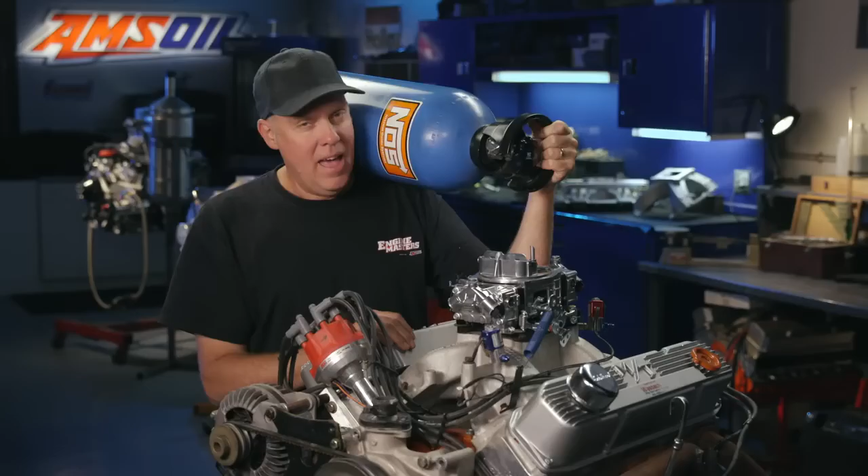I know you've read it, but is it true? Would you really blow up your engine if you ran nitrous oxide on a dual plane intake manifold? Well, we're gonna find out using the 383 out of the Roadkill Crop Duster, this time on Engine Masters.

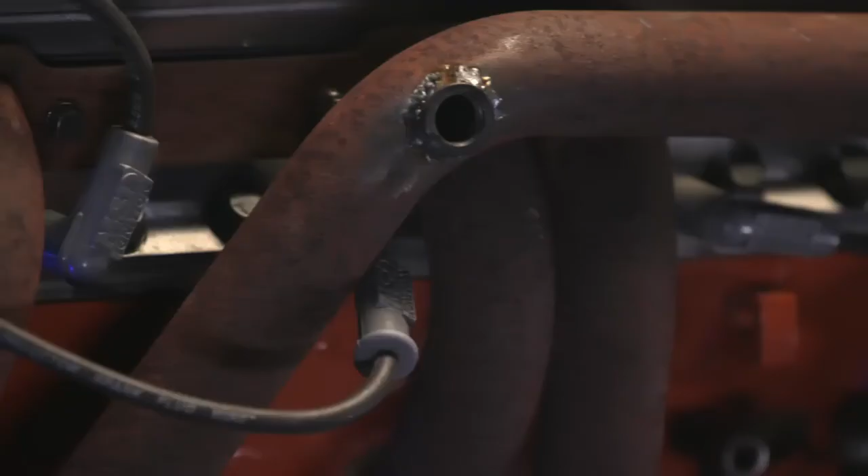Well, we're gonna find out right now, and here's how. We're gonna run both a dual plane and a single plane intake manifold on this big block Mopar, both naturally aspirated and with nitrous oxide, and check that cylinder-to-cylinder distribution with an oxygen sensor in every single header tube, so we'll know exactly what's happening in each cylinder.

That's gonna give us answers like: is the dual plane really that dangerous? Does a single plane make more power on nitrous for the same nitrous jet than a dual plane? And we're also gonna answer questions about how much power this particular engine makes.

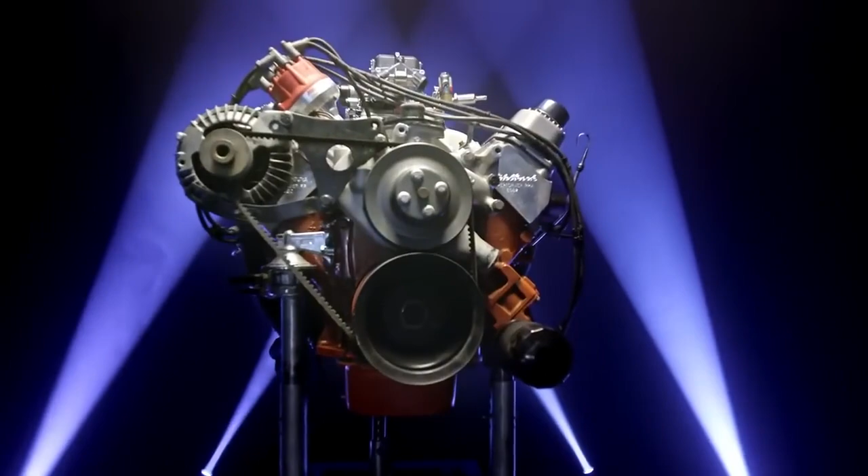Now here's what makes this engine cool. This is the 383 big block that is directly out of the Roadkill Crop Duster. You've probably seen that car, it's a white 1970 Duster that's been on both my Roadkill show and also Roadkill Garage. It's a pretty easy buildup that has run 11.60s in the car.

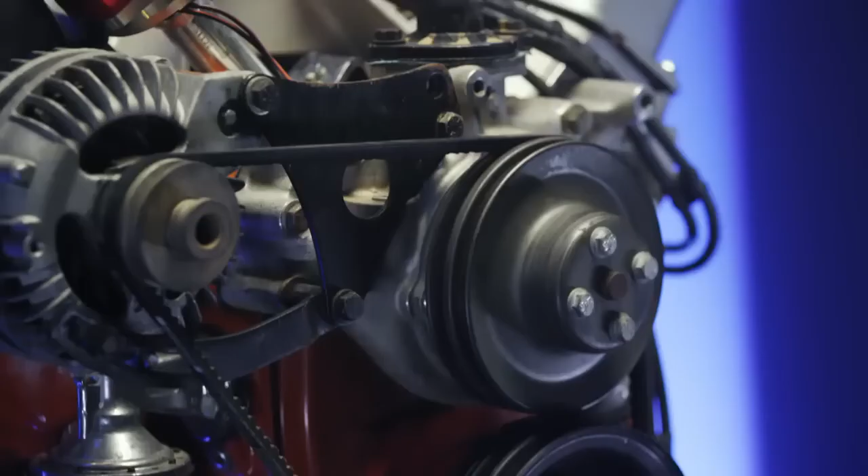Here's sort of the combo: bottom end, stock crank, stock rods, forged pistons, 11.5-to-1 compression. These heads are straight out of the box Edelbrock units, no big deal. Up top, we're gonna start off with the Performer RPM intake manifold from Edelbrock. The camshaft is a Comp Cams solid flat tappet, duration at 50 thousandths is 241, 247. Up top we've got an 850 Brawler carburetor, and we're running MSD ignition on this thing.

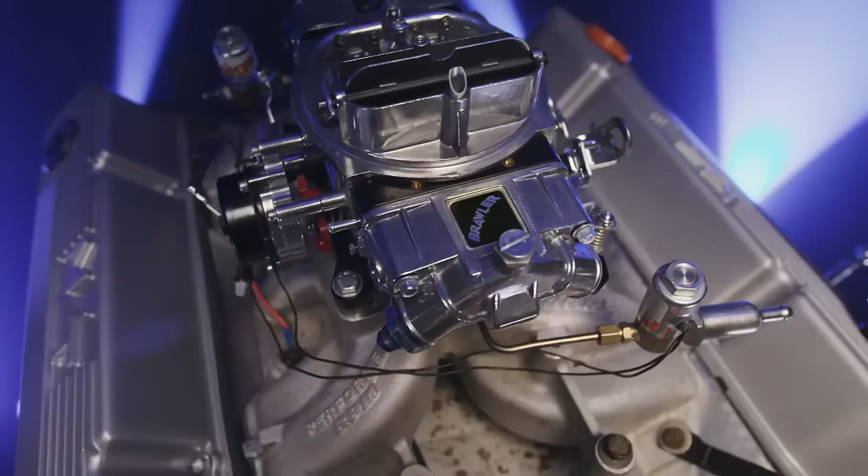And now we're gonna roll it into the dyno, put some AMSOIL in it, and fire it up for a baseline to find out what this thing makes before we start huffing some nitrous through it.

The stock crank and rods in this thing are gonna need all the help they can get, so even though it's kind of a basic deal, I'm gonna go all the way with the Dominator racing oil. Whenever I run a power adder, AMSOIL always tells me to run this stuff because it has really strong film strength. Even though we've got a small nitrous kit here, I think nitrous is one of the most abusive things on bearings, more so than a turbo or a blower, because you hit the button and bam, power increase like that—it's not like a slow boost curve.

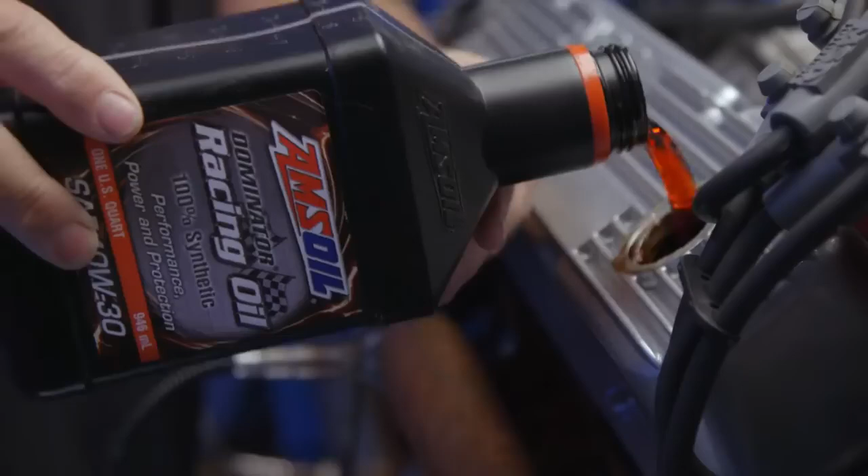Okay, we're ready for our baseline, which is the Crop Duster 383, pretty much straight out of the car with the exception of a different header and different carburetor. It even still has the alternator and the water pump and stuff on it. So Steve's got it tuned up, ready to fire it up, see what it does.

It's gonna be cool to watch 8 oxygen sensors in real time. Lighter? Yeah, why? We knocked about 2 pounds of dirt off of it.

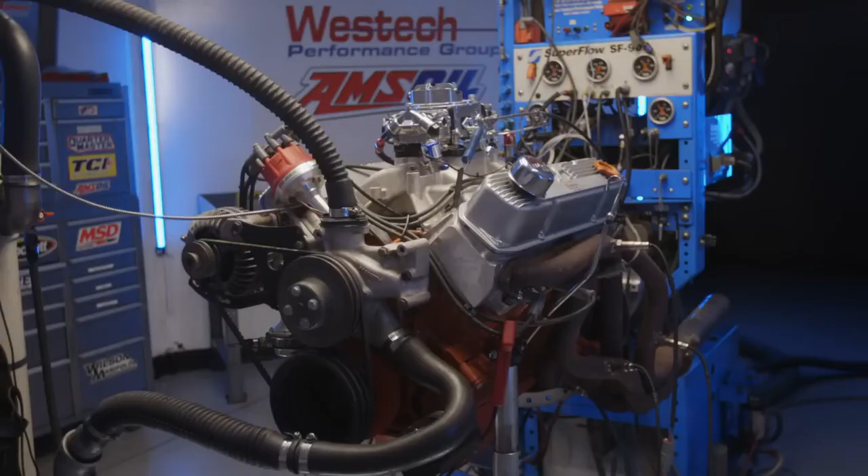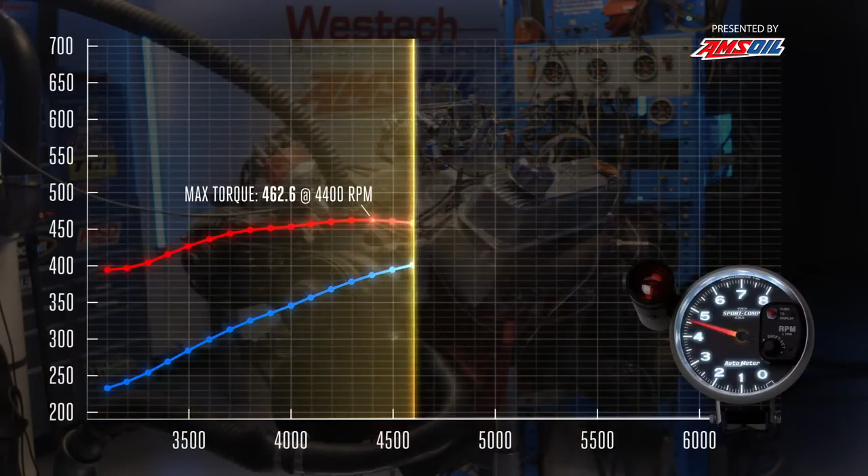Kind of a dog. I didn't even look at the power numbers, I was looking at the lambda. It's shameful.

462.6 pound-feet at 4,400, and it made best horsepower of 459.6 at 5,800. I think there's a number of reasons for that—this header's much worse than what we ran before. This is not a good header. No, it's smaller tube, and this has a terrible collector on it.

Plus, we have a mechanical water pump and alternator on it, and a different carburetor, and we're running 36 degrees of timing. This engine likes 40, but we wanted to do our nitrous testing A-B comparison with no other change other than the nitrous, so we pulled a few degrees of timing out of it.

But let's have a look at the whole curve. Yep, it's just down 40 horsepower from what we'd really like it to be. I think the header, the accessory drive, the carburetor, it all adds up. And the timing.

You know what I noticed though, looking at the lambdas, there was quite a bit of variation. I mean, some of those holes, there were 2 ratio points difference or more, cylinder to cylinder. Let's have a look at that.

He's got it pulled up here. When you start looking at cylinder number 2, it finishes up at 11.9, and then cylinder 4 is 13.7. Almost 2 full ratios in cylinders that are paired right next to each other, 2 and 4. And that's just a matter of air and fuel getting through the intake manifold.

I noticed it was kind of leveling out as RPMs increased. At lower RPM, there was more spread. It seems to kind of even out when you see it here.

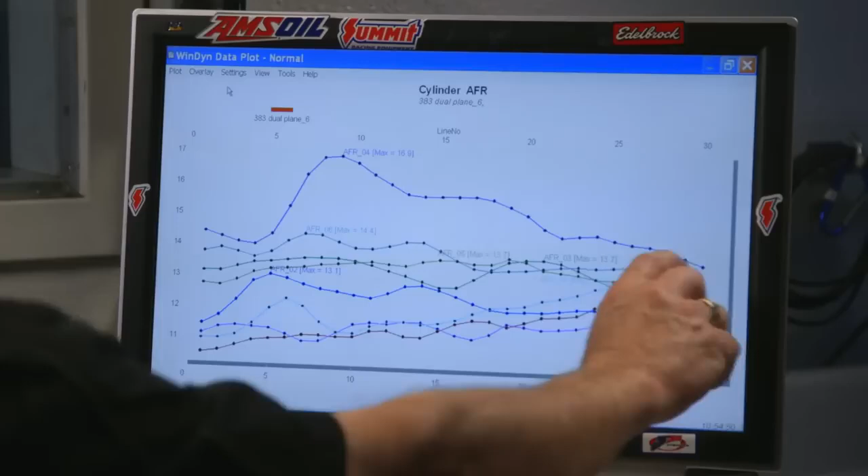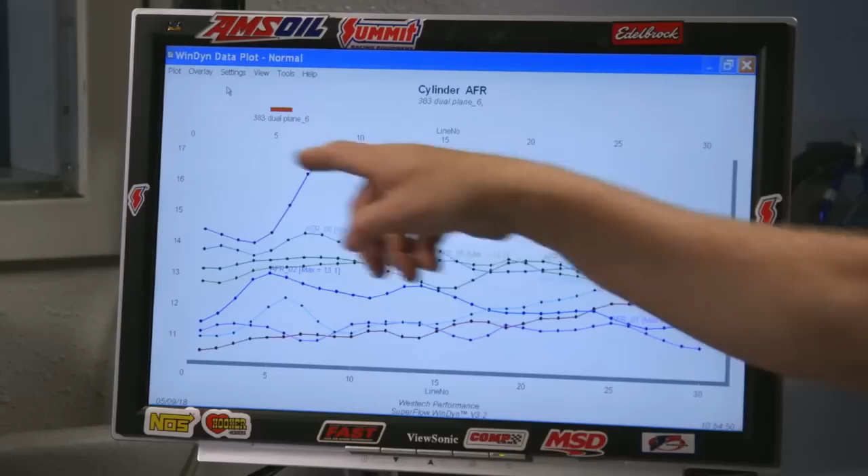This almost doesn't look too bad in scaling, but then you see this. That's pretty frightening. That might be a cylinder that'll detonate and fail on you, while some of the other ones are so fat they would never detonate. This is lean, and this down here is rich, and the scale here is almost 17 to 1 down to 11.1 to 1. That's a big swing when you look at cylinder to cylinder.

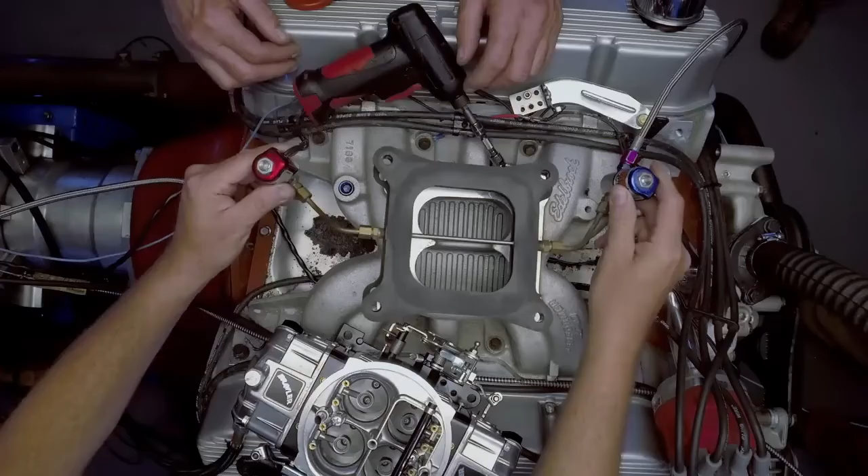So we're going direct to nitrous. This is like a cute little nitrous system. It's an NOS power shot, a fixed 125 horsepower plate system. It's about the smallest you can get outside of a Sneaky Pete. But we'll see what it does - hopefully it'll blow this thing to like almost 600 horsepower.

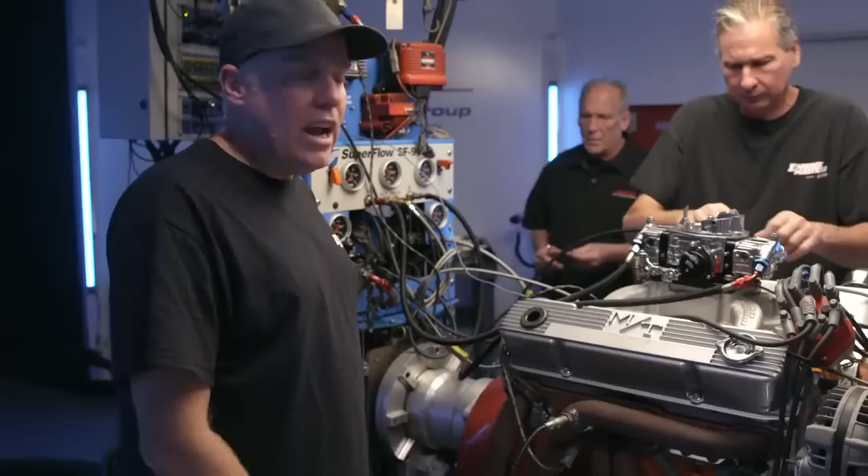Here's our arrangement for reading the air-fuel ratio in each individual cylinder. We took this old set of headers that Dulcich bought back in the 80s and left in his backyard, and wrecked them by drilling to put O2 bungs in every single hole, then welding them with no gas whatsoever. I put every one of them 13 inches from the port - you've got to put them between 12 and 18 inches down, and the longest distance I was able to get was on this hole, 13 inches on center, so that's what I did on all of them. So we should be able to read accurately what's going on in each cylinder.

Okay, we're ready for our nitrous testing now. This is a small nitrous hit, a 125 shot, but nonetheless we want to keep it really scientific between this and the other manifold. So we're monitoring the nitrous bottle temperature out there at 92 degrees, which affects pressure, to make sure it's the same for both runs. We also have to get the engine temperature correct, so it's a little bit of a balancing act right now. Okay, we should be pretty good right now.

Doesn't seem like we're getting nitrous now. Okay, we gotta go mess with that. Looks like it's only flowing fuel.

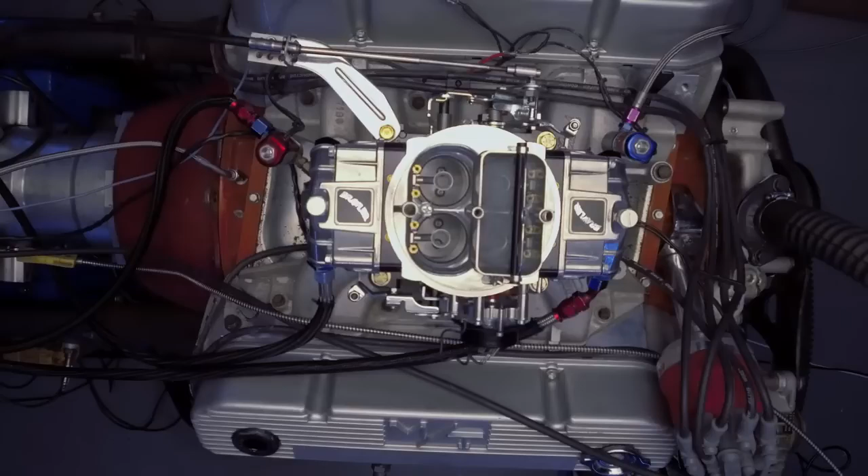Well, my nitrous system had been sitting around for like 2 or 3 years and the solenoid was stuck. So Steve had one of NOS's new sniper kits on hand. We have that sniper kit now jetted at 56 on the nitrous, 47 on the fuel. Should be close to 125, maybe 130, in that neighborhood. Yeah, I think we're ready to go. Okay, whack it.

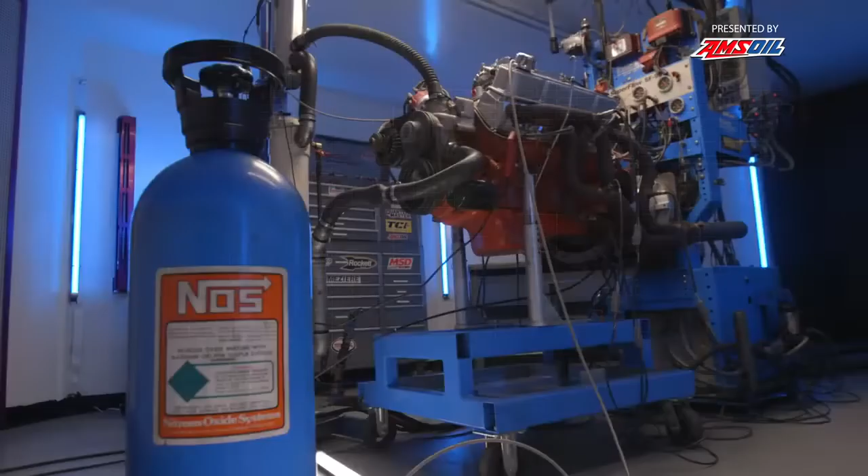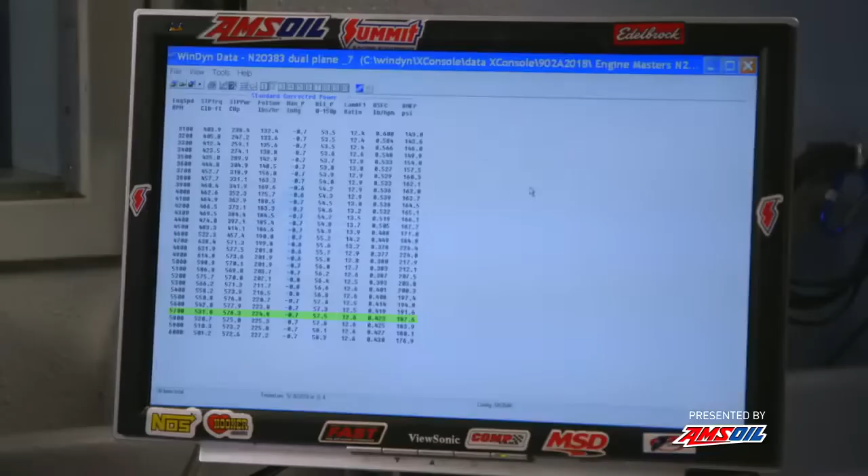So not bad, yeah. Did what expected, made 577.9 horsepower at 5,600 RPM. And the torque made 638 pound-feet. Usually peak torque happens right when you hit the button. So it picked up 100 horsepower, basically 110.

Yeah, so we could go up on it, but I think the reason we're here is to see what happens. But let's talk about that.

If you're flowing more nitrous through the intake manifold and more fuel, is it more of a demand on the dual plane? Might we see a bigger problem with the distribution on the dual plane with a bigger nitrous hit? I suppose at some point, but I don't think the guy running a dual plane is the same guy hitting it with a 350 shot. I was thinking like a 175 shot might be. It didn't appear to me like it affected distribution all that much.

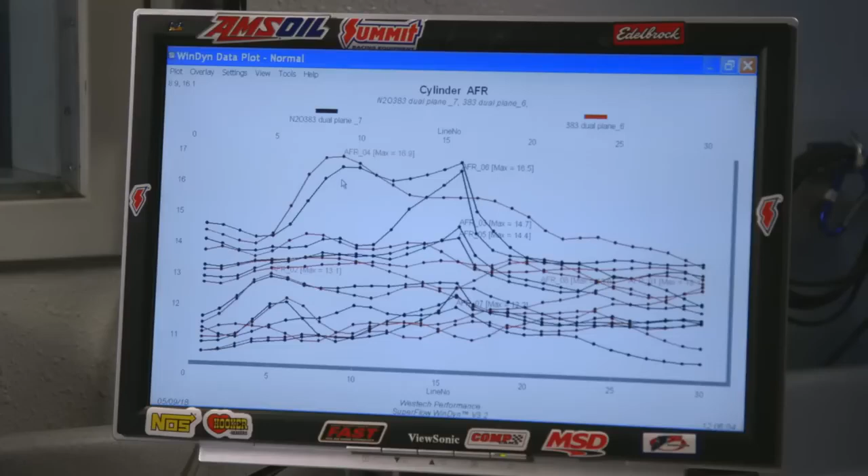As I kind of suspected, the red lines are naturally aspirated, black lines are nitrous, and it's really got the same problems. So would this make the argument that yes, you'd have a problem running nitrous because it has distribution problems? Because we're still looking at 16 to 1, no, but that's a spike.

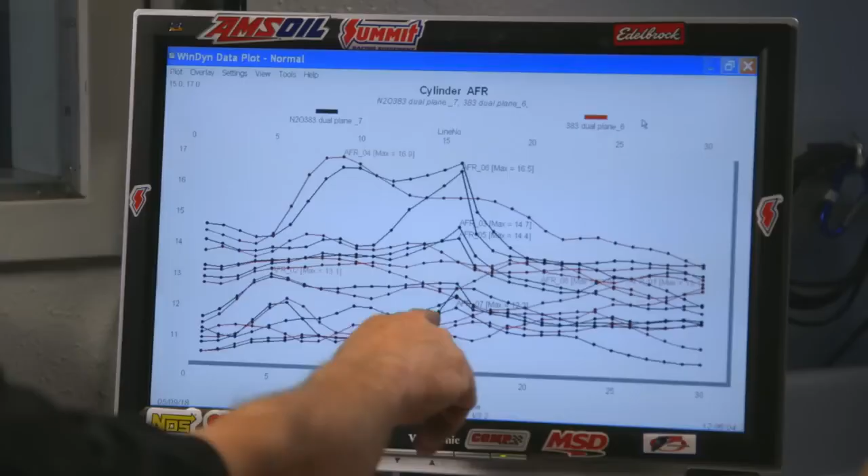The bigger the kit, even on a single plane, you will for maybe a tenth or two see a spike, 'cause the nitrous sometimes hits before all the fuel does. You're always going to see some sort of spike in every air-fuel ratio. The trick is how long will it be there.

Some of the nitrous tuners actually will increase fuel pressure to 12 or 15, and then jet down with more pressure to try and compensate for some of that. So then fuel gets there quicker, catches up to nitrous a little bit quicker.

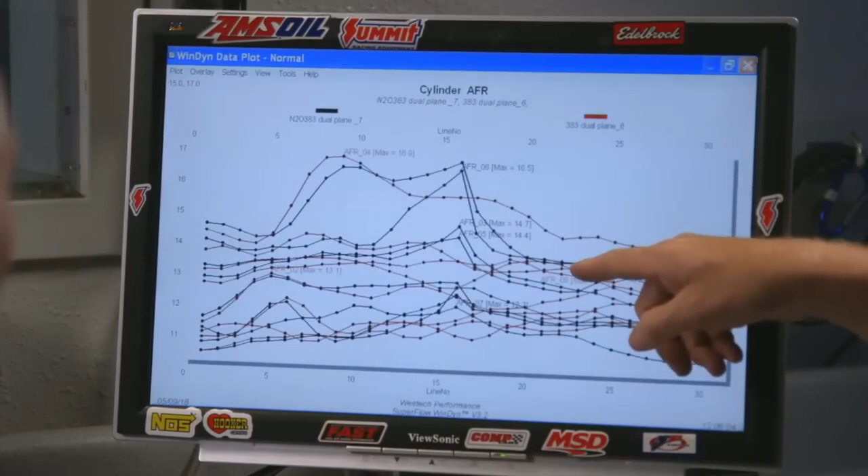But you're right, because you can see that it gets richer right afterwards, and then the flow is much tighter, but we're still looking at 13 to 1 on nitrous on some cylinders, and almost 10 to 1 on this one. So arguably the nitrous did tighten up the air-fuel ratios slightly, a little bit. It wasn't what you would really hope for, but at least it shows that it's not a horrible thing and you can't do it, or you've got these big problems.

Yeah, especially at this power level. It's just not that big of a deal.

Well, alrighty then. So do you want to go try and put more nitrous in it? Yeah, let's pick it up just a little bit just to be sure, because I think we'll have that objection from the fans watching that it's just too girly.

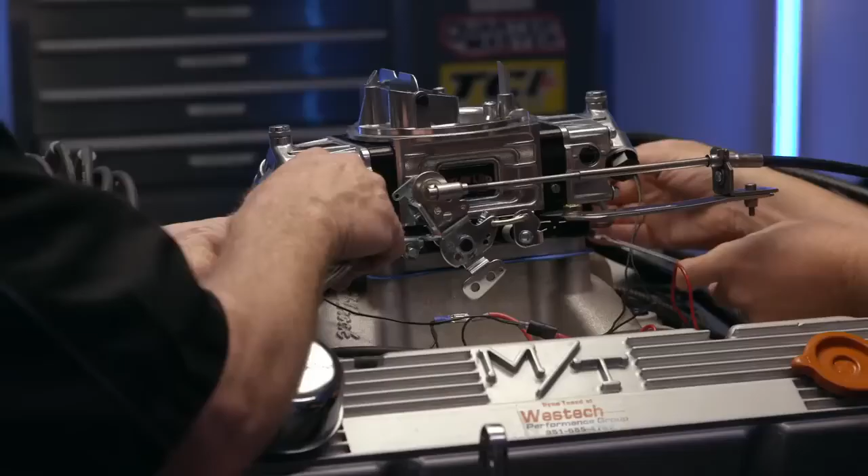With this sniper kit, we're actually able to change jets and make more power. So we're gonna go to a combination with a number 65 fuel jet, and a 73 on the nitrous side. So that's in the neighborhood of a 150 shot. Now we got the jets in it for more horsepower.

We've also put some race gas in it so it won't detonate, and we pulled another 3 degrees of ignition timing out just to be safe. But nevertheless, Dulcich has gone from being like depressed at the pathetic power to super anxious that we're gonna blow it up. I was going to say, we will blow it up.

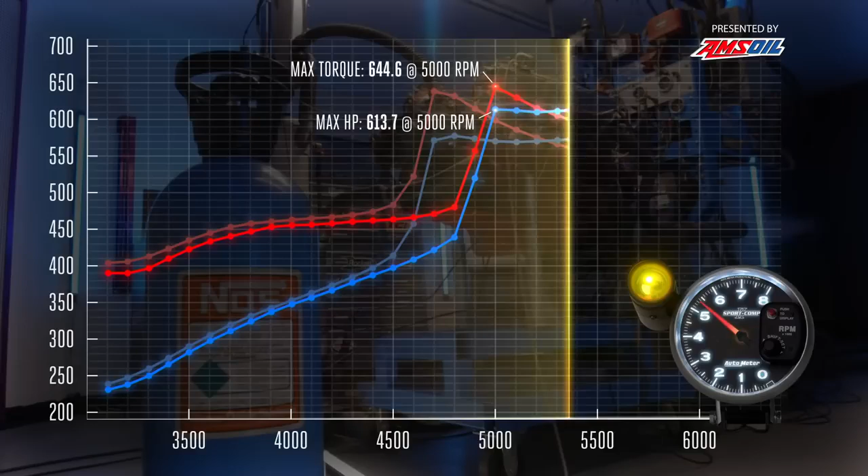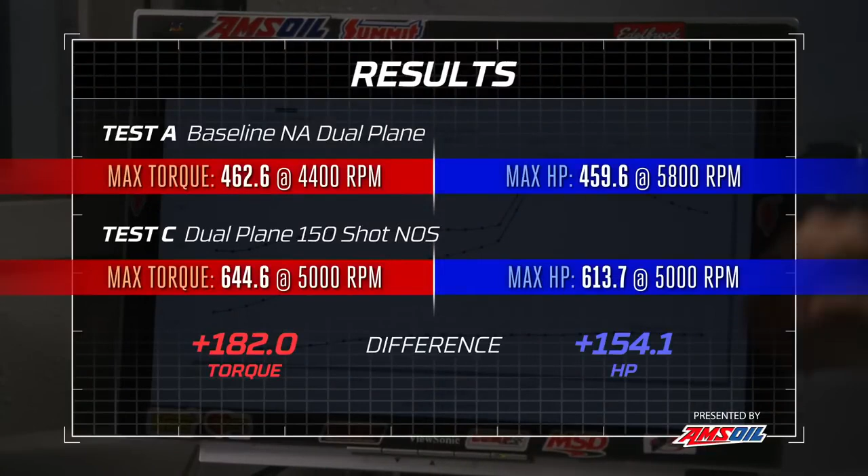So now we're making 644.6 pound-feet of torque, and at the very same RPM, we're making 613.7 horsepower. A lot safer now, isn't it? It is a lot safer. The spread from the richest cylinder to the leanest cylinder is nowhere near what it was before.

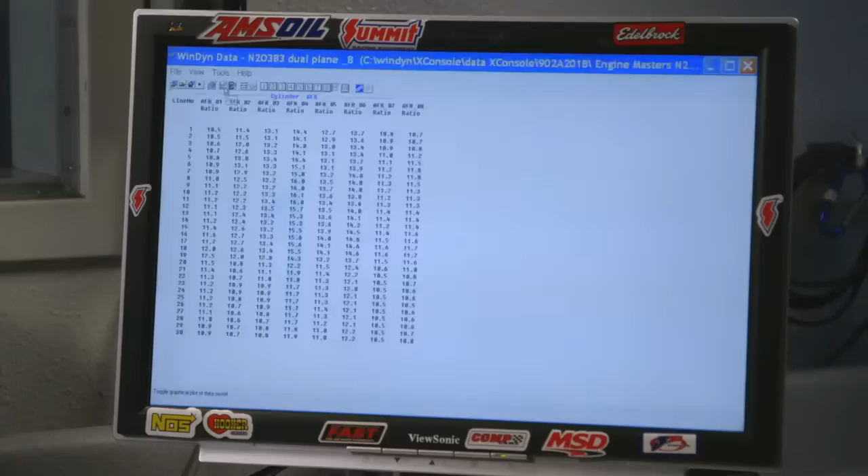Really? Nowhere near. Let's take a look at where we are here compared to where we were with the smaller system. The nitrous improved it considerably. Yep, it actually brought it closer together with more nitrous.

You know, actually running the bigger nitrous unit was a better test. That's what we learned so far. I'd say it was a good test both ways, because we now know that the more nitrous you put through a dual plane, the more the AFR cylinder to cylinder gets closer, I'm sure up to a point. You know, that whole distribution thing with a normal thing.

I mean, you could probably get away with 250, realistically, and not cause any issues. It just takes more testing to find out where that threshold is. But I think that kind of proves the point that it's not this horrible distribution problem.

It can't be done - you hear that all the time. Oh yeah, totally. Whereas now our leanest cylinder is basically 12-1. The nitrous system is a little bit too rich. But yeah, I think we just debunked that myth.

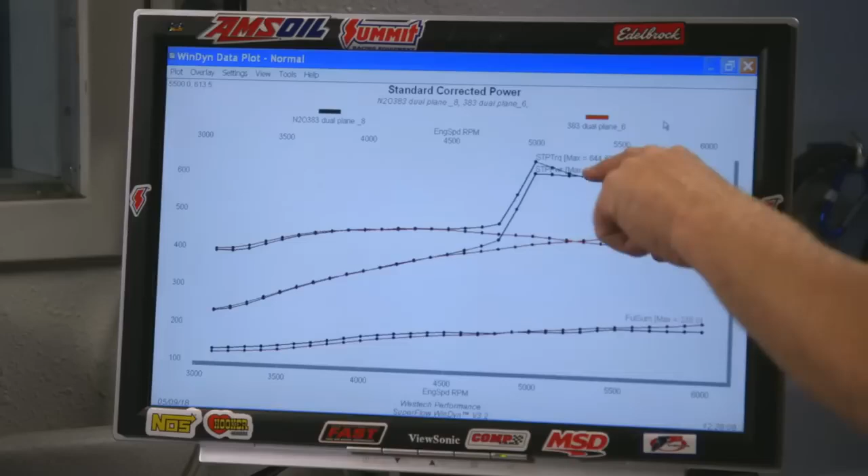You can run at least a 150 shot or more? Okay, well now what I want to do is put on the single plane intake manifold, see if the distribution problem still exists, and find out if the gain with the same nitrous jet is greater on the single plane than it is on the dual plane. I feel good about that test.

Yeah, me too. I love debunking myths, but I'm ready to put on the single plane. Me too. We're about to change manifolds, but I thought first I would go over a few things.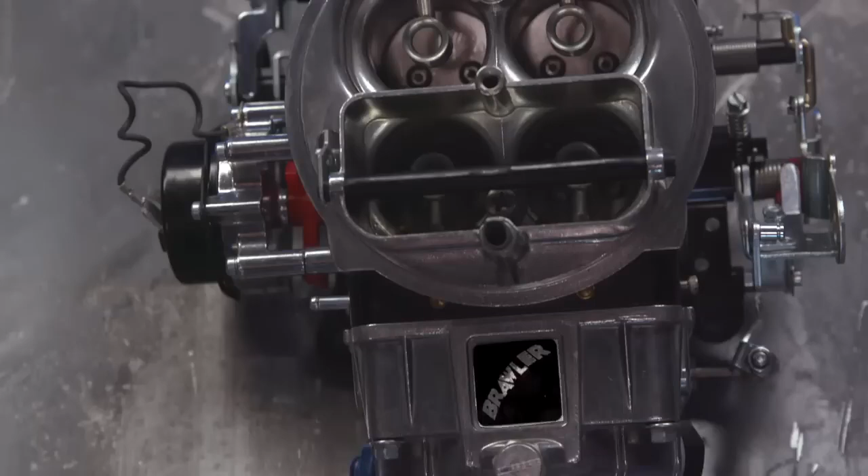I noticed on social media, especially when I post pictures, a lot of people ask about these Brawler carburetors. Just a little quick bit of information about them - they're a new low buck line of carburetors from Holley and QFT. People ask me, are they pretty good? I'm gonna say yes. I've run 850 double pumpers twice now, and I've had a 750 double pumper. These things are packed with features and have always run really good for me. So do I recommend them? Yeah, they're actually really good.

Okay, you saw a little bit of a nitrous debacle when we first started trying to do our test with this old power shot system that I had, which I think I bought from a swap meet someplace. I've had it forever, but it's been sitting for at least a year, probably more, and the nitrous solenoid was stuck. That often happens if these things sit around. You can rebuild these things, but obviously we did not bother with that at this point. Instead, here's what we installed, which is also from Holley and NOS.

It's a product called Sniper. It's a low buck adjustable nitrous plate system. I was just noticing that the plate here has a whole lot more holes in it than that old power shot setup, which only had 4 holes for nitrous and 4 for fuel. So I think this is actually a better buy, and we're gonna jet the thing up to make 150-ish horsepower.

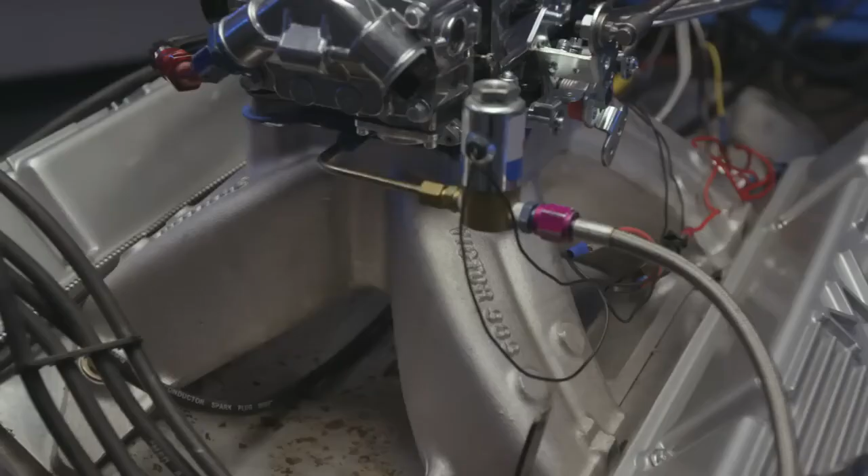Okay, now manifolds. Here is that dual plane that we just ran. You can look in there and kind of see why people think these things don't run well on nitrous, or potentially don't - they have 2 separate levels inside them. Each half goes to 4 cylinders in the engine. These things tend to make more torque and less top end horsepower.

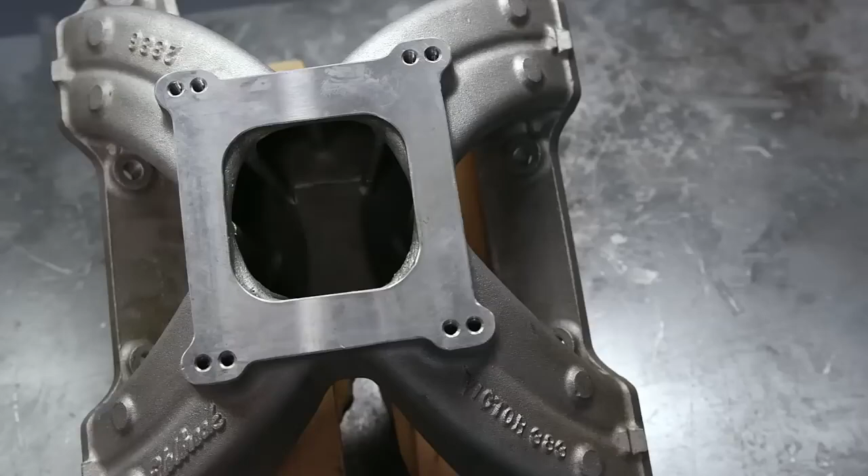Whereas what we're about to go to is the Victor single plane intake manifold. This is a nice big hairy manifold, especially when ported. I think on our 383, it's really not the manifold that I would choose for running down either the street or the drag strip, but it is going to answer those questions about fuel distribution issues and whether nitrous makes more power on this style of manifold. So we're going to go install this pooch right now.

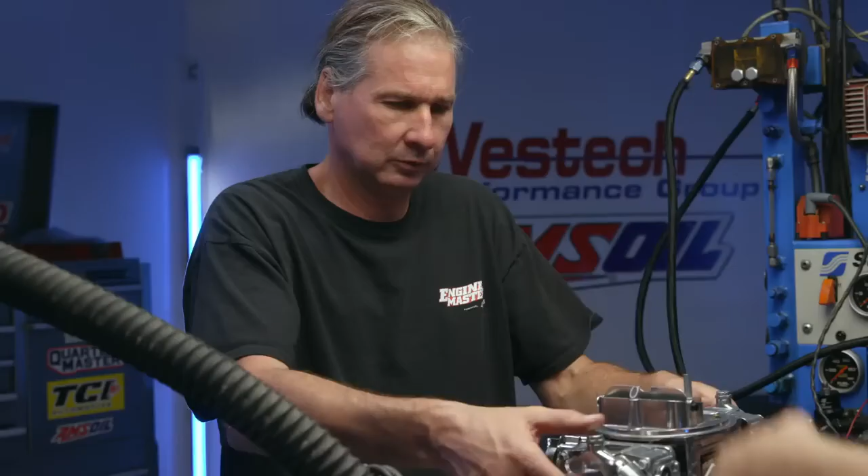Just pull this guy aside. The cool thing about the big block Mopar is that it doesn't have water in the intake manifold, so we're going to be able to just pull off this one and slap a new one on there like nothing.

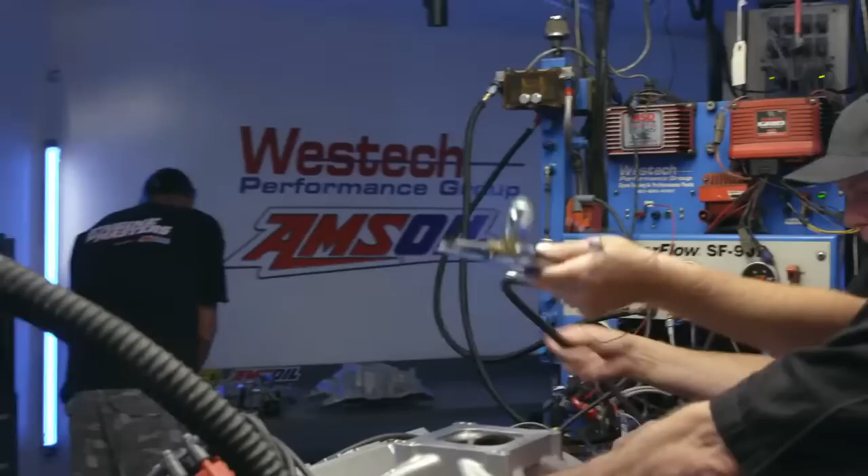Now we're gonna have to go fire this thing up, and almost certainly it's gonna need a jet change because of the single plane versus dual plane intake. And we'll run it NA and then come back and spray it again.

I have to make the observation here that the engine looks much more racy. Yeah, too bad it won't run that much more racy. I know, that's the downside.

Now the single plane manifold's in place and all tuned up, and we also bumped the ignition timing back to where it was when we ran the dual plane naturally aspirated. So what you're about to get is a clean A/B test of the dual plane manifold versus the single plane manifold.

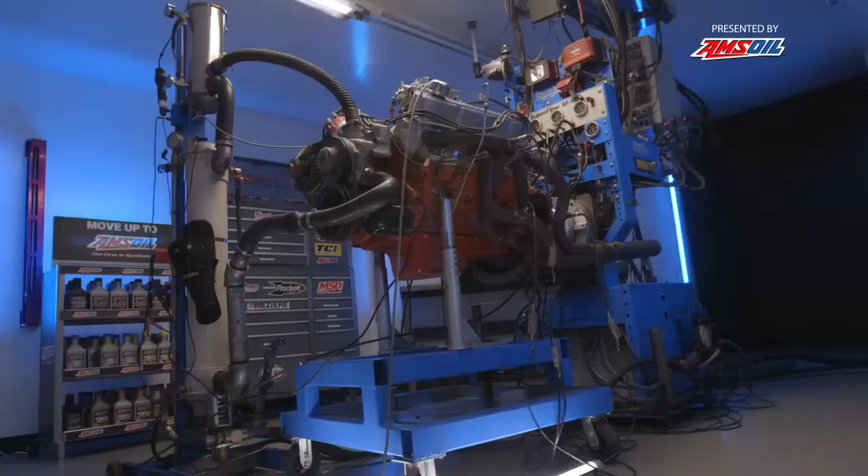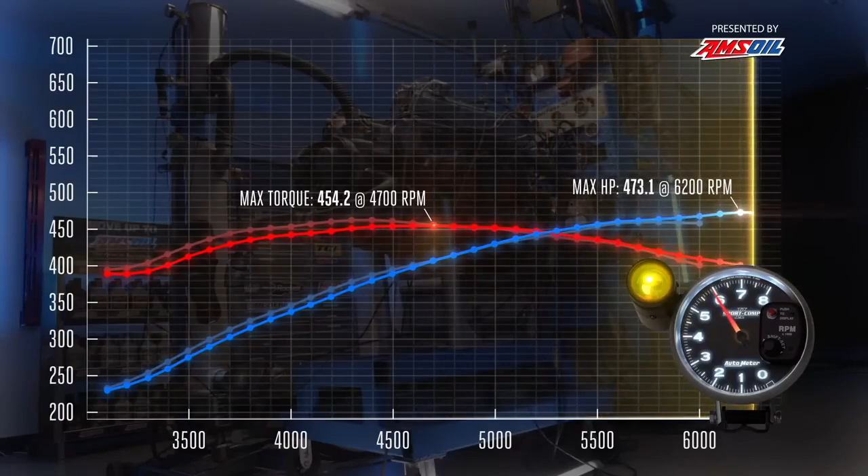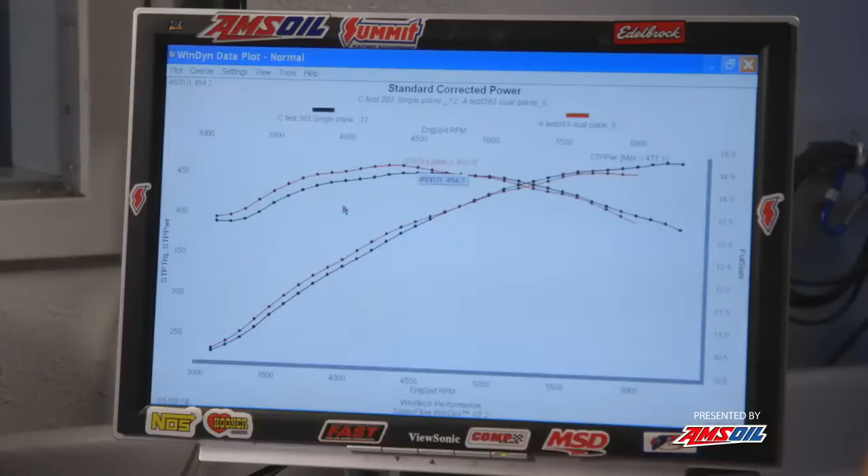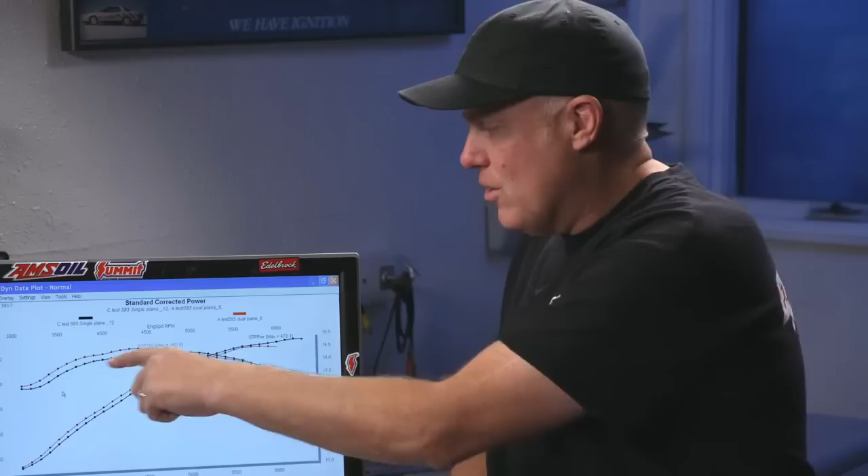Actually, Steve ran it higher too. Well, it wasn't done where this dual plane was, so I went ahead and ran it 300 higher just so we could get to peak again. Our new power peaks with the single plane intake manifold are 473.1 horsepower and 454.2 pound-feet of torque. You can see really looking at the graph, it tells a better story than just the peaks though. You're giving up a lot of power below 4,700 RPM.

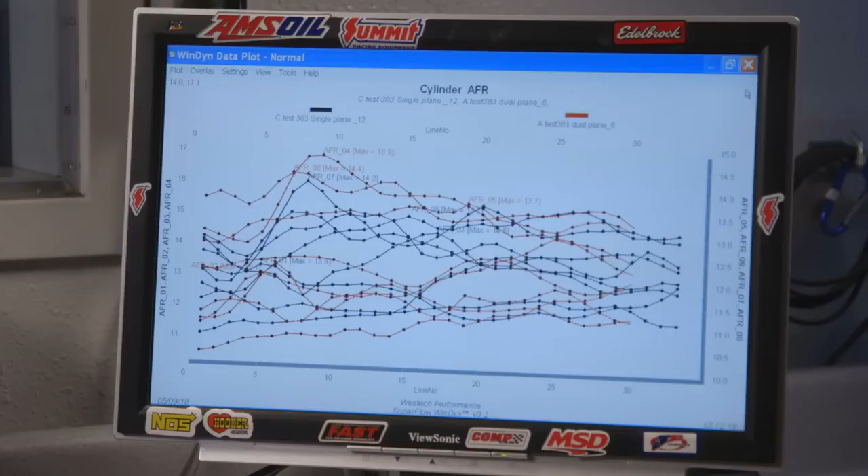But what we're really doing here is looking at distribution issues and nitrous. So let's have a look at what the cylinder to cylinder looked like with the single plane. It's better, but it's not fantastic. But will it make more power on nitrous? Let's go squirt this thing. I'm tired of messing around with 470 horsepower, it's boring me.

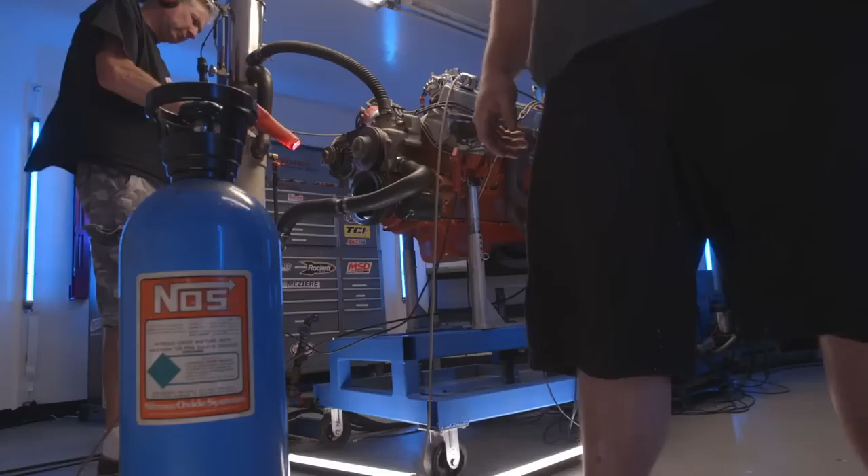The last test, theoretically the good one. Single plane intake manifold, 150 shot. We pulled the timing back and whack it. The only thing I'm curious about here is, does it make more power? And I think it might, because the airflow seems to continue at a higher RPM than the dual plane.

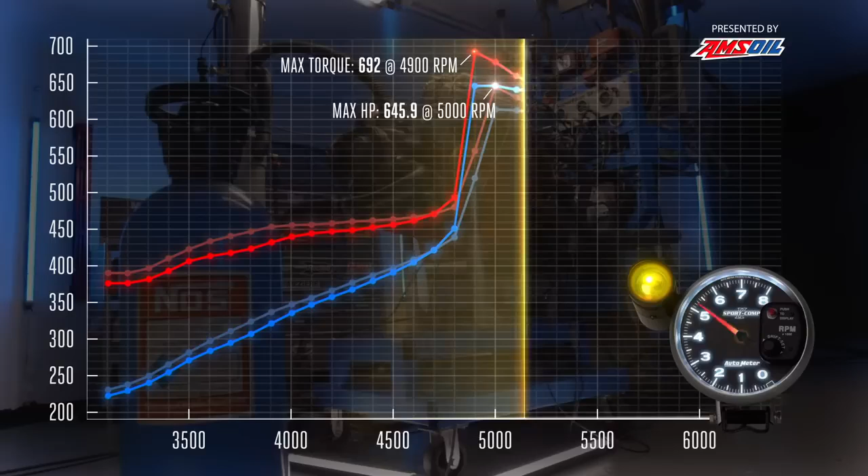Yeah, but I wonder if there was a differential there to start with, but I think it's still made more base. Well, our power peaks are now 692 pound-feet of torque and 645.9 horsepower. So it did make more power than the dual plane, but let's analyze.

Final answer on nitrous oxide on dual planes versus single planes. So peak to peak, the single plane made a whole lot more power. Single plane made 692 pound-feet of torque and 645.9 horsepower. The dual plane was 644.6 and 613.7. So the single plane made 32.2 more horsepower and 47.4 more pound-feet, right at the hit.

But I'm not sure that I'm going to call that an accurate data point. The other thing is, the single plane actually made 10 horsepower more NA at that RPM, right in here as well. So, peak to peak, the gain or the difference between the two maybe isn't 30, maybe it's more like 20. But why? In the real world, that's what it is. No, the numbers are the numbers. But this is mimicking just what it did with the dual plane versus single plane.

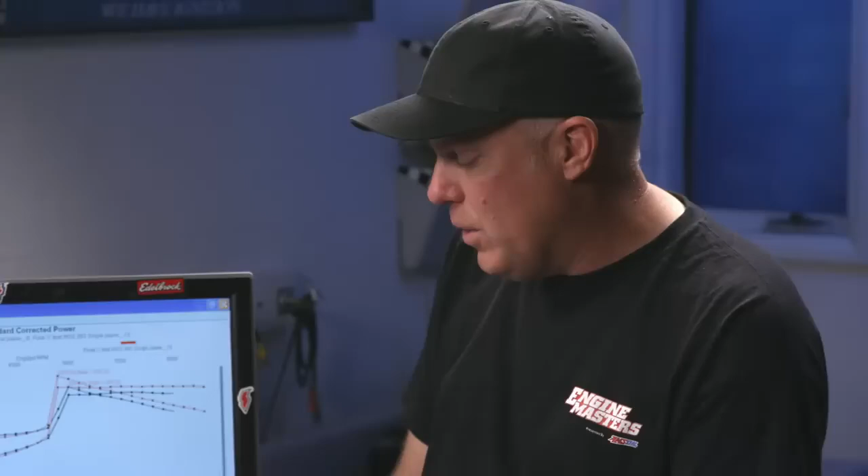It's coming off a higher base, basically. We just gave the peak to peak numbers, but the peaks are right when you hit the button, and I'm not sure that that is a good data point for comparison. It's not, because that's where just how much nitrous is in the line, whether it's purged or not, can make a really big difference.

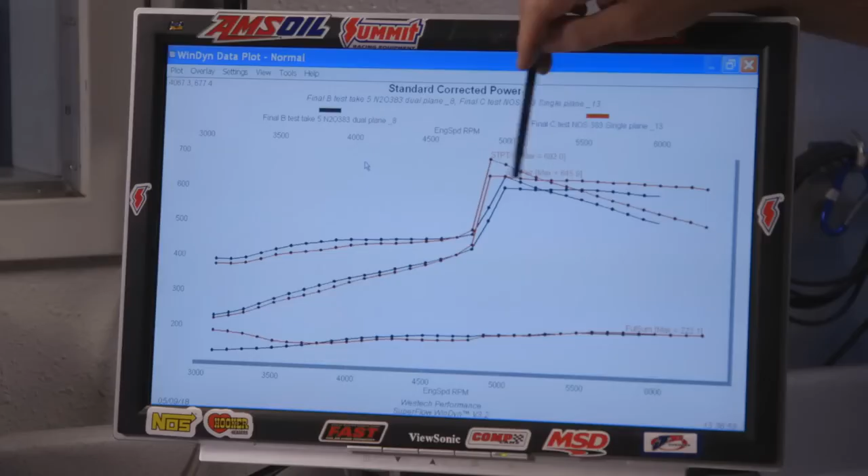Well, admittedly, both of these systems could be tuned up a little bit more, but I think we're still going to see the same difference up high, because they both, we can tune them both up to be better, but I think it's still going to have a difference in favor of the single plane. But that's a little bit of a surprise to me that that's happening down here at 5,200. I expected it to make more power way up at the top when it starts to saturate the dual plane manifold, but it made it everywhere. But conventional wisdom would indicate that the single plane's better on nitrous.

That's what people believe, and it's true. There's more volume in the intake manifold, and there's more junk going through it with the nitrous. Nitrous carries oxygen with it, but it's still displacing air.

What about cylinder-to-cylinder distribution on good nitrous? Let's go look at that.

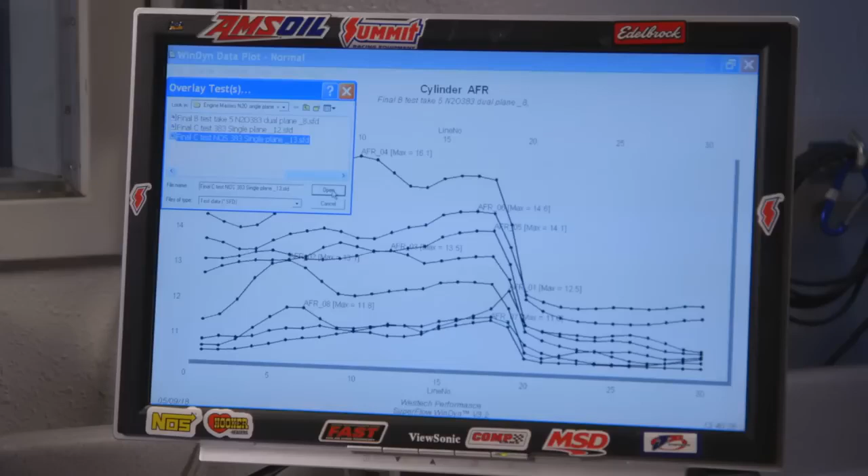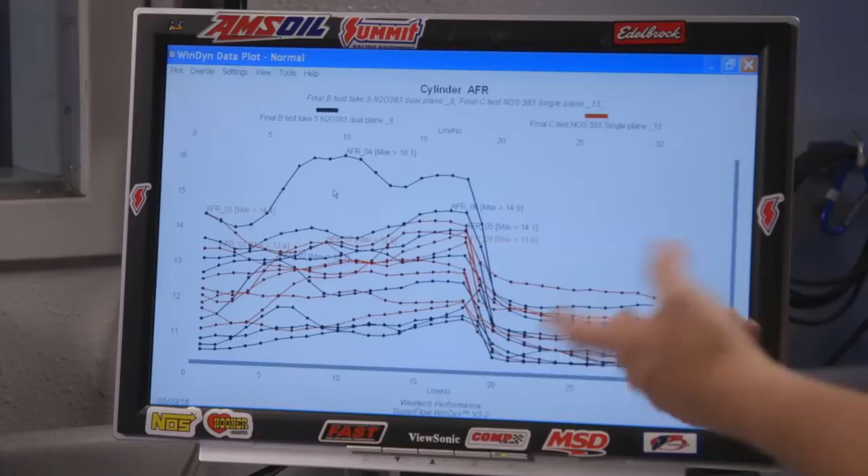Now what we're looking at is cylinder-to-cylinder distribution on the dual plane versus the single plane, black being the dual plane, red being the single plane. None of this is naturally aspirated and all of this is after we hit the button. We really expected the single plane to be tighter, but it's not really. There's one outstanding cylinder on the dual plane that's not that good, but the rest of it is actually a little tighter than the single plane.

It comes down to the design of the particular manifold, because this shows us what a single plane Victor or Super Victor on a 383 Mopar will do as far as cylinder-to-cylinder distribution on nitrous. But you're saying the data's really that narrow? I think so. I really do.

What it really shows us, though, and I think that's kind of encouraging, is you don't have to be afraid to run a 150 or 175 shot on a dual plane. And that was my point when I conceived this whole episode, because I'd be comfortable with anything up to like a 250 shot on a dual plane, honestly.

That's what the trend pretty much looks like. It actually got, when we had run the littler jet, it tightened up a little bit with the bigger jet than the smaller one. So if that kind of trend holds true, it gets better and better. But with a couple hundred shot, most guys who are going to do a 250 or 300 shot probably aren't going to be running a dual plane on the engine anyway.

So if you need a little extra fun, there it is. Here's something that the late Monty Smith from NOS told me all the time, which was the air-fuel ratio that makes the most power naturally aspirated is the AFR that makes the most power on nitrous. That's why I think people don't realize they're driving around with their cylinder-to-cylinder distribution all over the map to begin with.

It's not a scary thing. It just is what it is. It's happened for decades, and the same's true on nitrous. So just do it. That's my answer. I think it's a great answer.

Okay, I'm sold. Let's put nitrous on my ride. Put nitrous on everything. Yeah. Cool. Well, I learned something and I proved my point. That's a perfect episode. Always makes you right, and you're always happy with that. Right.